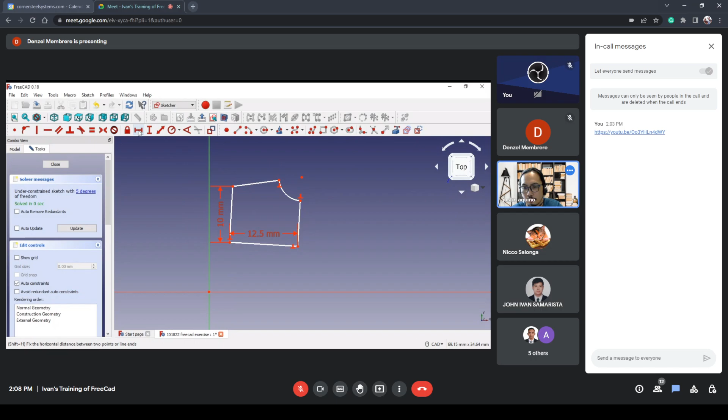See. Okay. Sorry. Okay. Okay. So, ano yun? Alt-M ba yun? Yung M yung hotkey nag-change ng control? Yes, sir. Just M key lang po. M key. Then constraint rules.

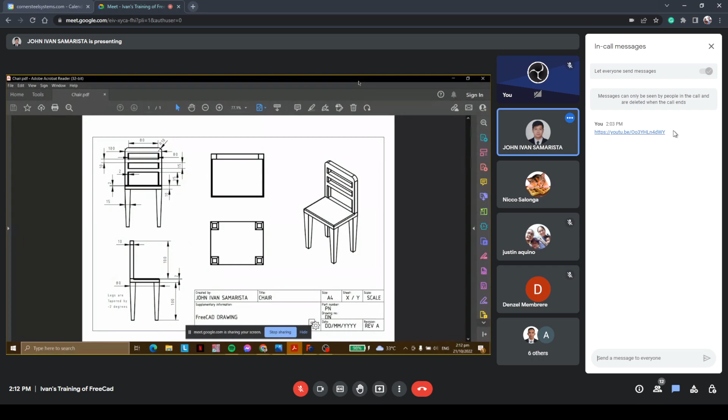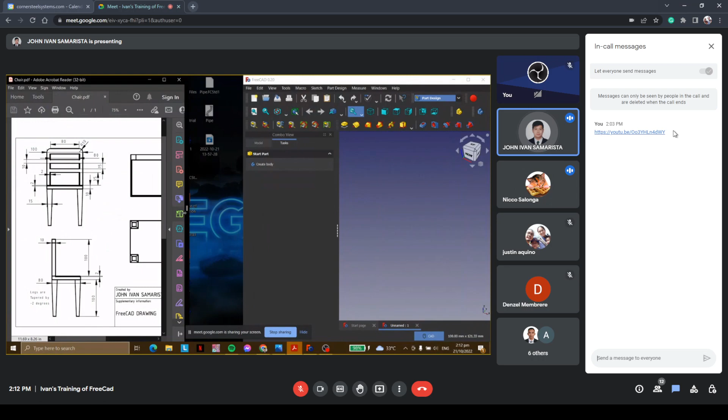So for the first model, I've created this yesterday, so we'll try to recreate this one. It's a simple chair. So wait, let's just open FreeCAD first. Okay, and now, in this specific object, the most important tool that we can use here, aside from the tools that I've introduced last meeting, is the external geometry tool. So let me show how it can be used.

So in this exercise, we'll try to replicate this simple chair. So again, we'll go to Part Design. So I'm already in Part Design, and then we create body, and then we create sketch. So in this case, I'm gonna be choosing the XY plane or the top plane.

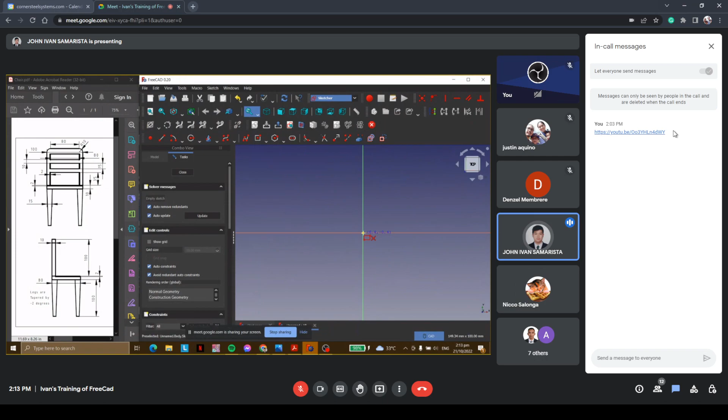Okay, so now we'll proceed to the sketch. So the very first thing is that we make a rectangle. Basically, we'll use the centered rectangle because we want it to be situated at the origin. And as we can see on the left side, the dimensions are: this is 100, and then this is 80.

Now we close this one and then we use the pad tool. We use a length of 10 millimeters. So as I've said earlier, there's one tool that's very helpful in creating objects that require different surfaces, or if an object requires you to make a sketch on a certain surface of an object. That tool is the external geometry.

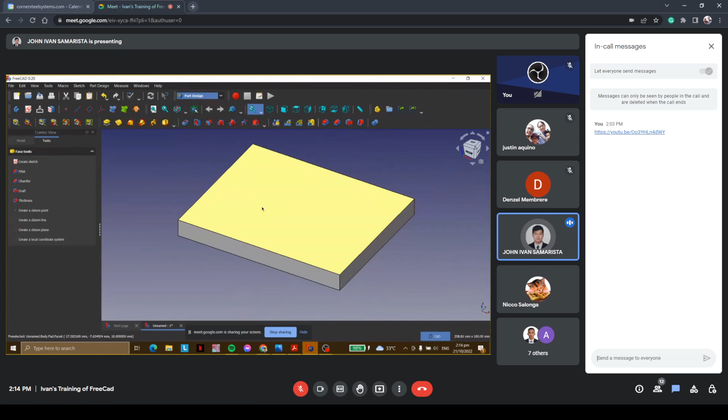So for the external geometry tool, we create a sketch first. Okay. After clicking the sketch of a certain surface, we can see the external geometry, and that is this one. It creates an edge linked to an external geometry.

So let's say we're just making a sketch here without external geometry, using a rectangle. As you can see, it's very hard for me to determine if I'm working on this exact point. So there could be a huge human error here in terms of drawing an object.

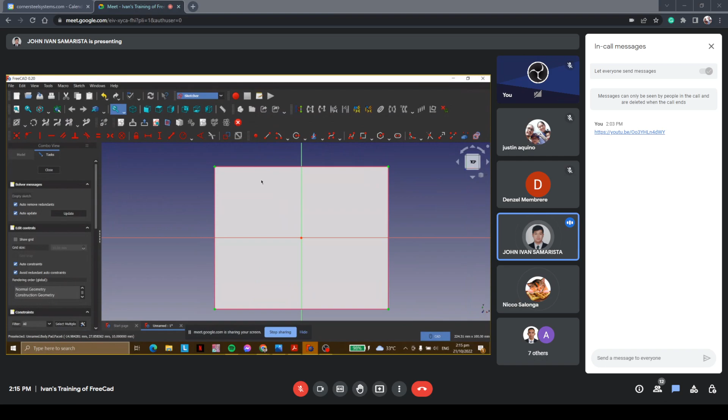However, if you use the external geometry, we just need to select the sides that we want to access. In this case, I will be selecting all the sides. Okay. After selecting the sides, we can already proceed with our sketch. Now we need to find the rectangle, and as you can see, we can already access the exact corner or point of this block.

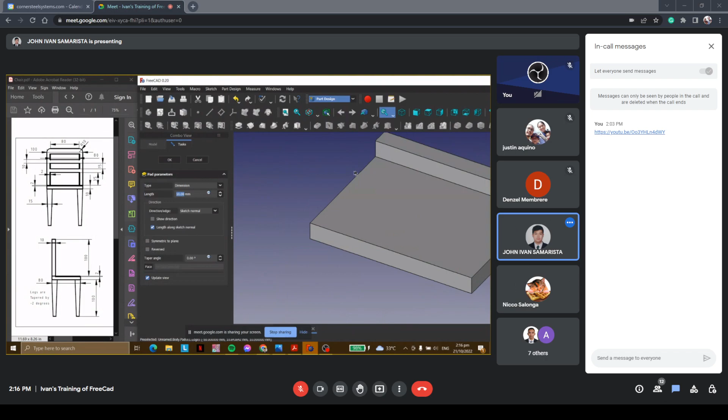And on this side, you can see that the side of this sketch is already collinear with the external geometry. Okay, so this dimension should be 10. Then we close and then we pad it again. This should be 100 millimeters.

Okay, after this, we need to replicate this part of the chair. So again, we click the surface that we want to sketch, and then we click create sketch. Again, we will be using the external geometry. And then we just try to replicate the specifications indicated on the left side. So we use 3 rectangles. Oh, no. I'm gonna be using the centered rectangle, and then try to sketch a rectangle here at the center.

Okay, after that, we just set the right dimensions. So this one should be 80. And then we'll make this one equal with the two sides. So we make this equal. The next thing is this one must have a dimension of 15. And then the distance between this one and this one should be 10.

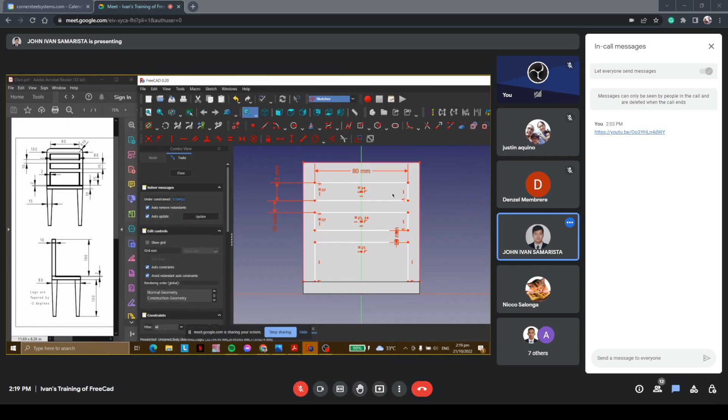So we close this, and the next tool that we will be using is the pocket. The pocket creates a pocket with the selected sketch. So we select the pocket and we just increase the length until there's a hole in it. Okay, that's okay. And now the last part is how do we create the leg.

The process is still the same. We just need to select this surface, left click, and then create sketch. After that, we need to use the external geometry again because we want to get the exact point at these 4 corners. So we use the external geometry, and then we create 4 squares.

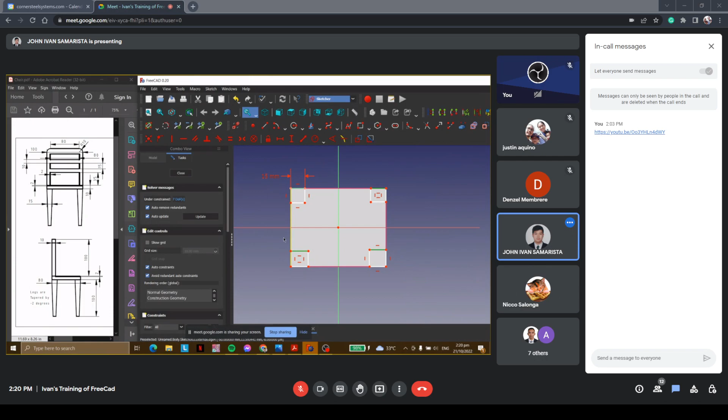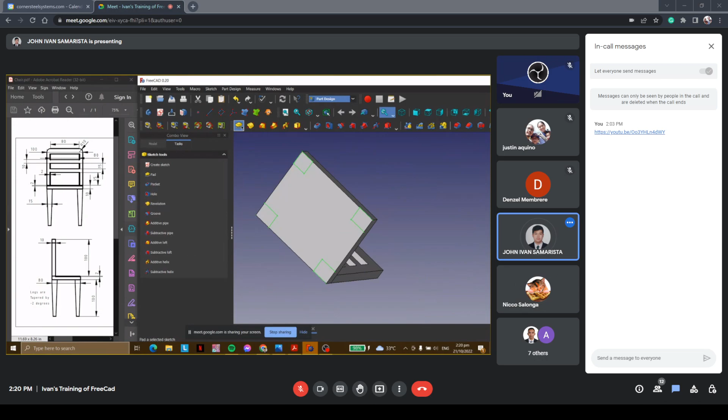And now the dimension must be 15. And I'm gonna make this one equal to this 4. Should be equal. And then this side must be 15 as well. So select everything. And then equal, so 15. And then we close, and then we pad it to 100. So we go back to padding.

So as you can see here, I've added some details. So it says here that legs are tapered by -2 degrees. So in order for us to do this, we just need to adjust the taper angle here. It says here -2 degrees. And then, okay. And then after that, as you can see, this 2 millimeters here and the 10 millimeters are fillets. So we need to fillet these 4 corners.

Fillet. So this should be 2 millimeters. And then this as well. This all must be fillet as well, so this should be 2. And then for this one, this should be, okay. This one should be 10. Okay, basically we're done with the chair.

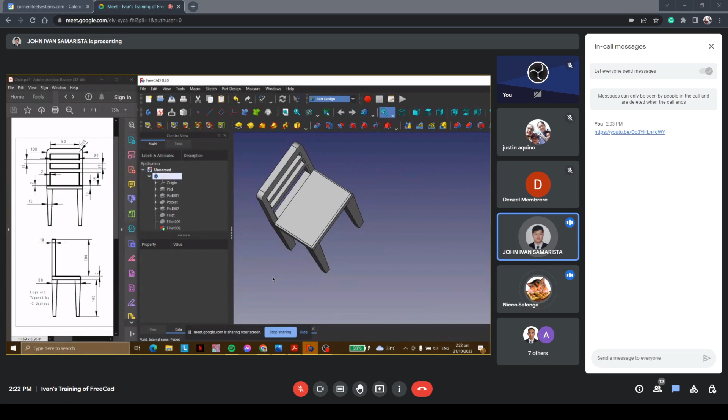So at this juncture, I will be showing you how we project this into a technical drawing. So as I've mentioned in the first session, here in the workbench selector, we can do different kinds of stuff. So if we want to project this drawing in different views, we need to go to TechDraw.

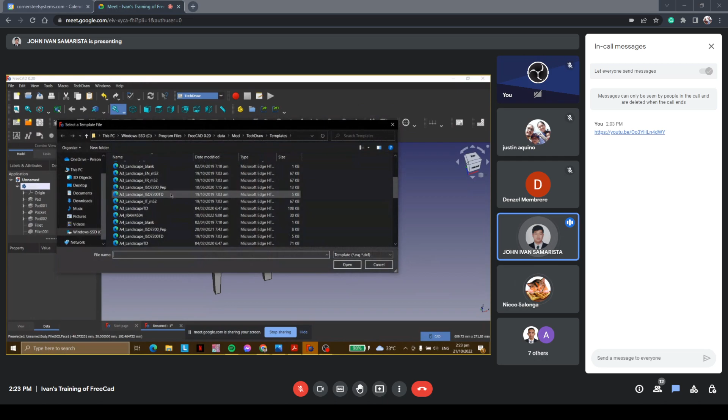So under TechDraw, we need to select first the type of technical paper that we're dealing with. So we can access that by clicking this one, the insert page using template, and then we can choose the format. So in this case, I will be choosing the A4 landscape. Then we press open. And then, so how do we project this chair on this technical paper?

So let's say we want to project the front view. So we can project the front view by just clicking, well, make sure that it is in front view already. And then in front view, and then make sure, wait, I think there's, okay, never mind. So let's say we want to project this one on this technical paper. So we need to select first the body, and then after selecting the body, you need to click the body here in the combo view. So after selecting the body, we just need to click insert view.

And then after clicking the insert view, we can see here in the other tab that the chair is already here. But it's obvious that the chair is kind of big, so we just need to adjust its size. So in order to do that, we can just click the view, and then here at the property editor tab, we can see scale type. So as for the scale type, we need to change the page into custom. So for the custom, we can adjust the scale.

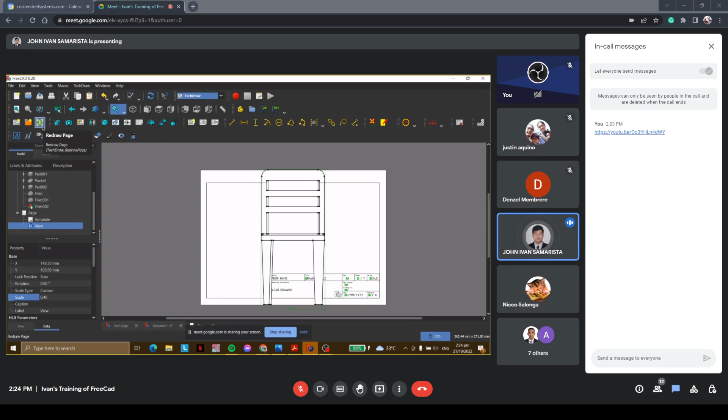So before we can see changes in our technical drawing paper, we need to refresh the page. So we need to click this one, the redraw page. Then yeah, there you go, the front view. And then let's say we want to project the side view. So we just need to orient our chair, let's say like this. And then the same process.

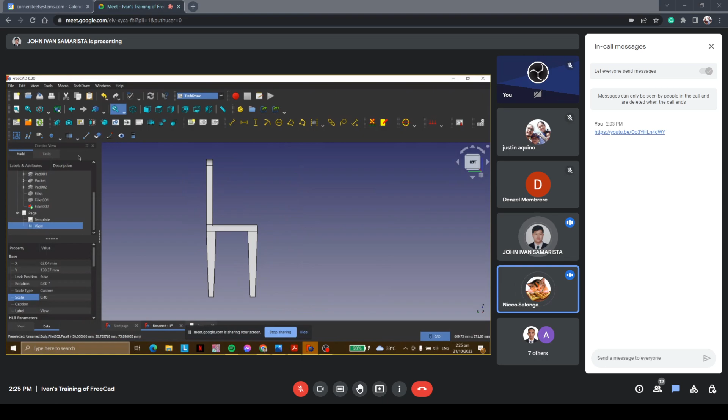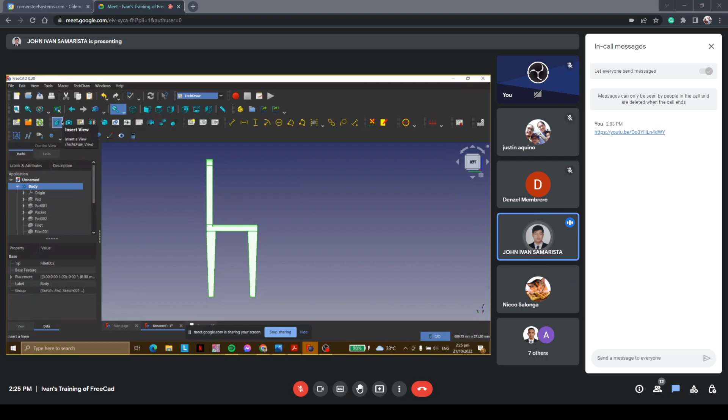We just need to select the body again. So to make sure that the body is selected, the object is already highlighted. So we need to click the body and then we click insert view. And there you go. Insert view, and then scale type, we must change it to custom. And then the scale must be 0.4. And then we refresh. Okay.

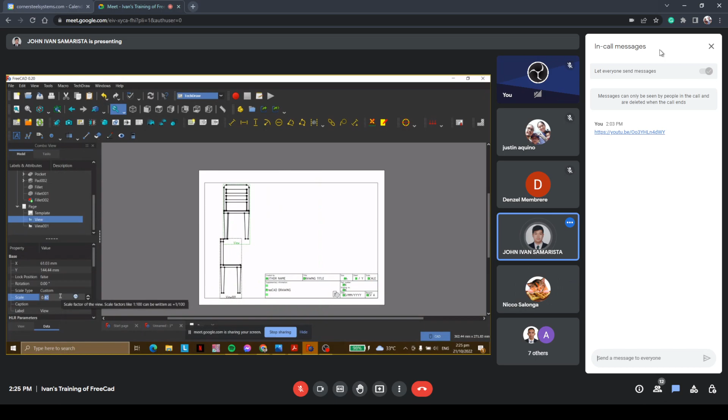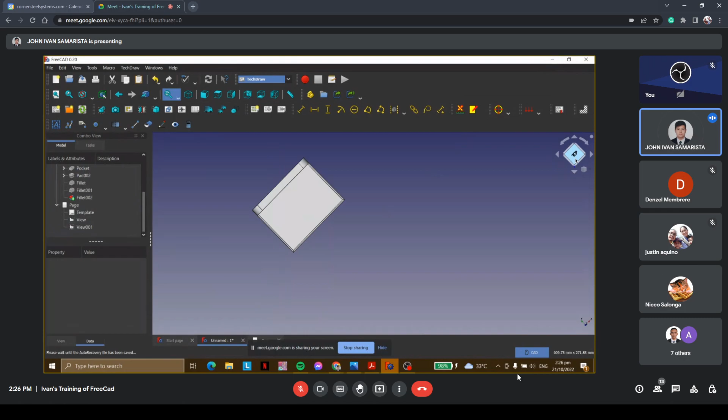I guess we need to make this smaller. So I'll adjust this again. I'll make this 0.35. And then this one 0.35 as well. And then we refresh. And then let's say we want the top and bottom view. So to do that, again, same process. You just need to go to top view. And then we click the body again and then insert view.

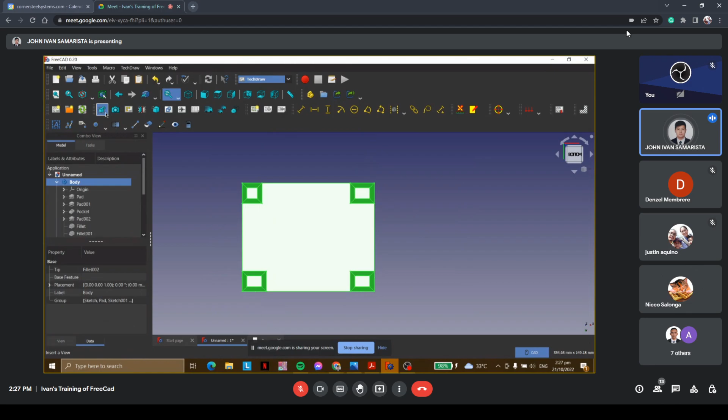And then change the scale type to custom and then scale it to 0.35. And then refresh. I guess it's a little bit small, so I'll make this 0.4 and then refresh. Now, how about the bottom view? So we just need to go to the bottom. So bottom view. Same process. We just need to click the body and then click the insert view. And then after that, we need to adjust the scale type to custom and the scale to be 0.4.

Okay, and then lastly, as for the isometric view, we just need to click this box here, and then click isometric. Same process: click body, and then click insert view. Then click this one, view, and then we change the scale type into custom, and we want this to be 0.4.

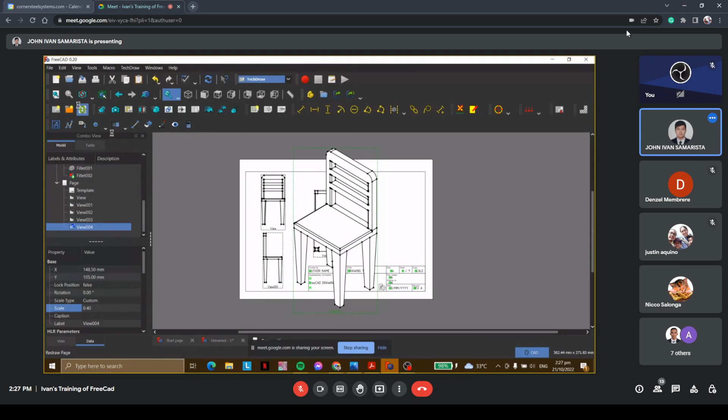Okay, now we've already projected the different views of the chair. We can change the labels. For the labels, we just need to click this view, and then we can go here at the property editor, and then we look for label. We can change this to front view.

This one, we can change this to side view. This one, we can change this to top view. This one, bottom view. And this one, isometric.

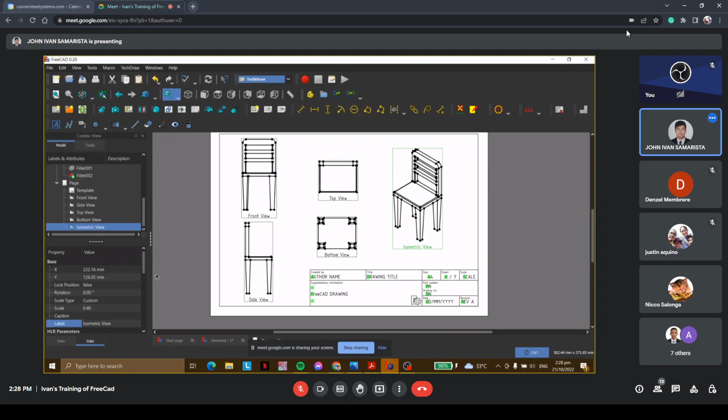So how do we put some dimensions? In putting dimensions, we first need to select the part that we want to annotate. In this case, I will be selecting this one, and then I'll be using the insert horizontal dimension. So this is 80. Then let's say I want to get the radius of this fillet part. I'll click this one, and then I'll just use insert radius.

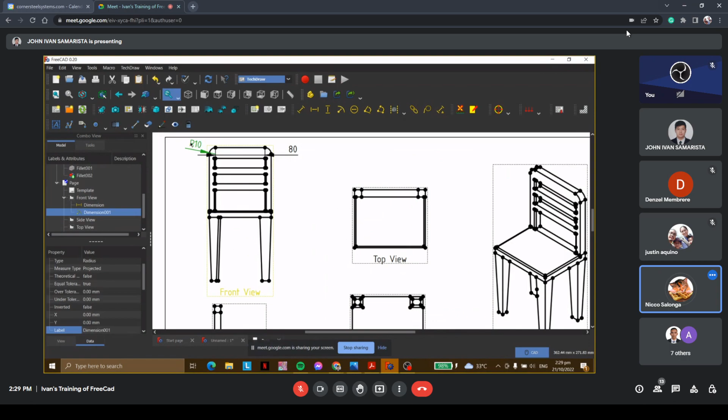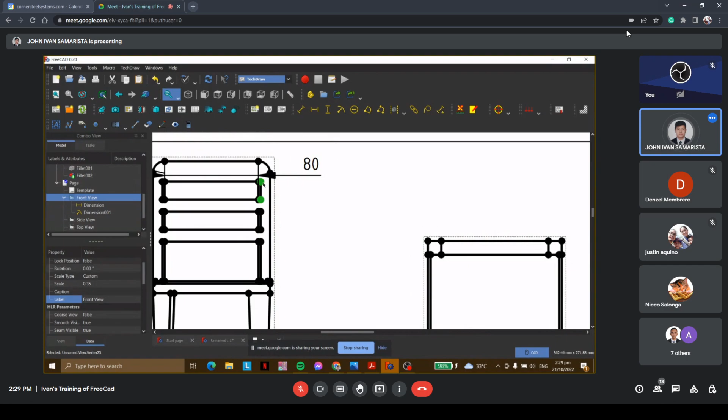And aside from choosing a line, you can also get the dimensions between two different points. Let's say I want to get the vertical dimension of this one. I just need to select the 2 points by clicking control, and then the vertical dimension. And that is 15.

So that's basically it in terms of technical drawing. The more specific technical drawing I will be teaching in the next lesson, which might include the blow up details and the section view. So that's basically it for the first model. In this model, the most important thing to highlight is the use of external geometry. Again, external geometry is used for us to access an exact point or exact line on a specific surface when we're sketching.

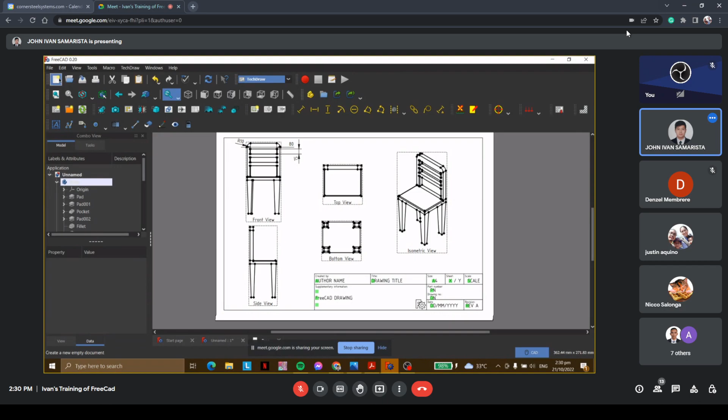So that's basically it for this chair. I'll leave this one as an exercise so you guys can replicate it. I'll be sending the PDF of the technical drawing later. As for the next model, we'll create a new one, so we'll just open a new one.

Okay, for the new model, we'll try to replicate this pipe. Nice. Okay, so this pipe, again, the process. In this pipe, we will try to use different tools of FreeCAD such as tangent, the arc, and Boolean. Boolean can be used in order to combine parts.

Aside from that, this part of the pipe we can project using the additive pipe or the sweep tool. We will be drawing a reference circle here and then a path that it needs to follow. And then lastly, we will be using the datum plane. Datum plane is very useful when we're dealing with objects with different surfaces that we need to sketch on.

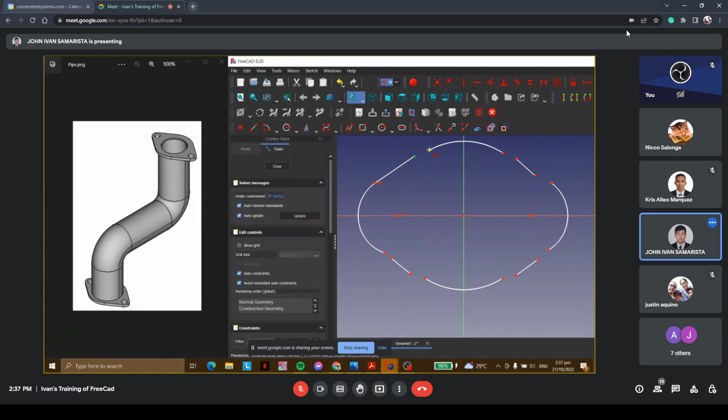Okay, so how do we connect this? We can connect this by using this tool, the constraint tangent. It creates a tangent constraint between 2 entities. So if I click this constraint tangent, we just need to simply click the points that we want to connect. In this case, I'm just clicking the end-to-end points. So I'm not pressing control. I'm just selecting the points as is.

Okay, so after this one, we need to adjust the dimensions. Again, we need to use the constraint radius, and we want this to be 20. We want this to be 20 as well. And then this one should be 72, and this one should be 72 as well. Adjusting the horizontal distance, this point and this point must have a horizontal distance of 90. And then this point and this point must have a horizontal distance of 180. So yeah, basically this is the shape of this part of the pipe.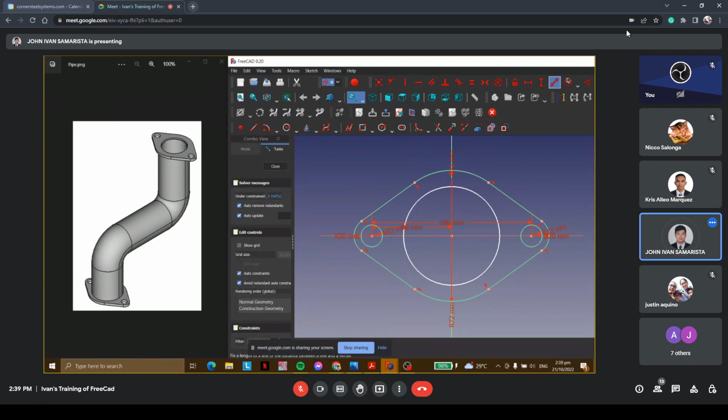And then after that, we need to add two circles here, the holes. And then we need to set a constraint radius of, let's say, 12. After that, we need to add another circle here for the hole. We need to set constraint radius of 50. Then, as you can see, it's already fully constrained, so we close this one and then we pad it. Okay, now we're done with the first part. So after this one, click OK.

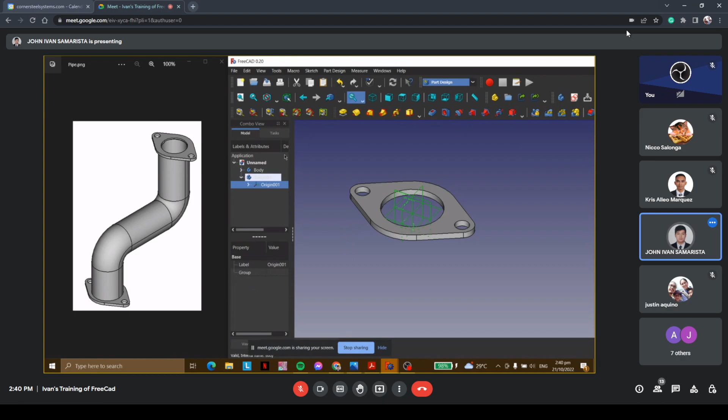So we need to create a body once again. We need to select create body. And then as you can see, we created the body 001. After this one, we need to click this one, the origin 001, and then we click the space bar. As I've said in the last meeting, in order for us to hide or unhide objects, we need to press the space bar. So in this case, if I press this origin, go something like that. And then, as I've said earlier, we will be utilizing datum planes.

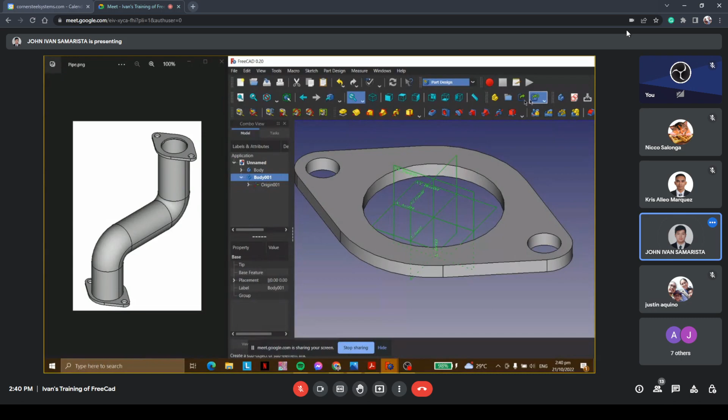Datum planes are very important in this part because we want to access the origin, the centermost point of this part. And then we want it to be situated on the same surface. So to do that, we need to click this plane, and then we need to select this one, datum plane. Okay. Now we already have this datum plane. We can select this one. So we want our plane.

So we need to select this one, and then we select the datum plane, and we want our plane to be situated 10 millimeters in the z direction, because we want our plane to be on the same surface as this one. I've used 10 millimeters because we padded our sketch earlier at 10 millimeters. Now we've created our plane, so we can simply click on this one and create a sketch.

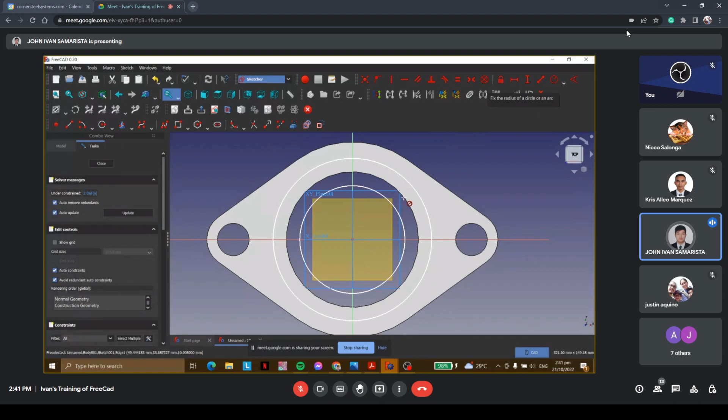At this part we will be drawing the circle that is our base circle for our path. To do that, we use the center and rim point, and we create two circles. Then we adjust the constraint radius: this one should be 60, and this one should be 50.

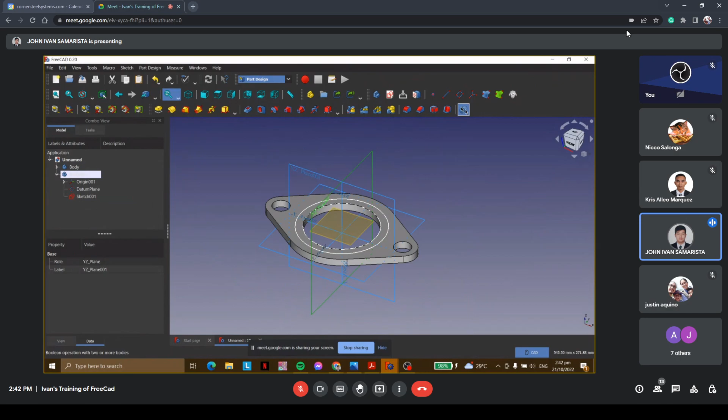We close that. The next part would be creating the path of this circle. To do that, we need to select the YZ plane, create a sketch, and on the YZ plane try to sketch the path. In this case I'll be using the polyline.

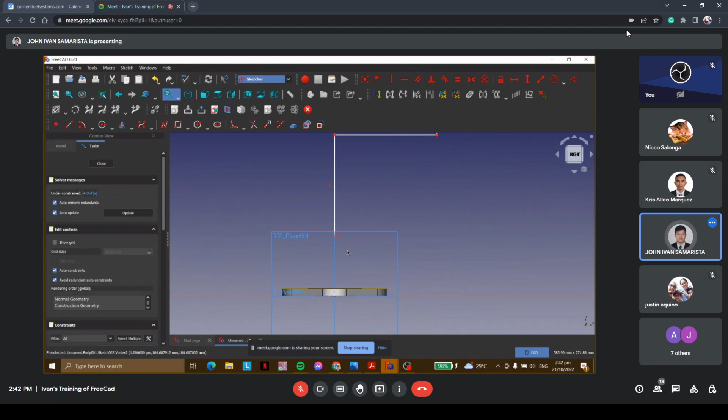Here's our polyline. The very first thing we should set is proper dimensions, so this point and the bottom point must have a vertical distance of 10. After that, we need to fillet these two sides.

In order to do that, we just click this one, fillets, and then click these two. Then we set a vertical distance from this point to this point - let's say 200. And then we change the radius to 70.

After that, let's go back to the sketch. I'll delete this first, and then create a longer line here.

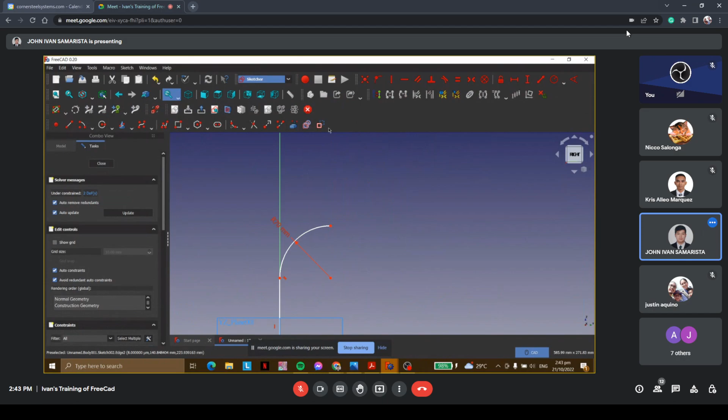In this one, we also need to fillet this corner. Again we click fillets, and then set a radius of 70 again.

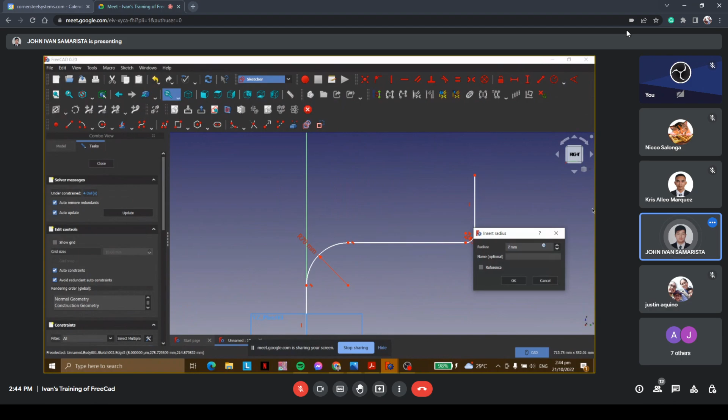Then we want this one to be horizontal. Next, we need to make this one 200 first, and then we want this one to be 70. Then we want this to be horizontal, and let's just make sure that this is 200.

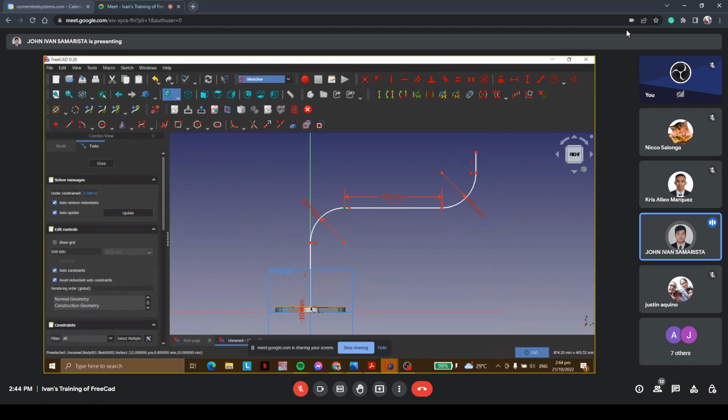Oh, it's 100, let's make this 200. And then this part should be 200 as well. Okay, and then click close.

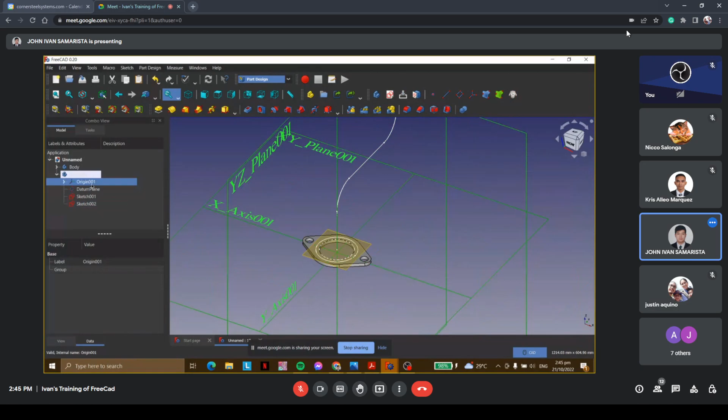In this case I'll be hiding the origin for us to see our base circle and our path, and I can also hide the datum plane. As you can see, here's our base circle and our path.

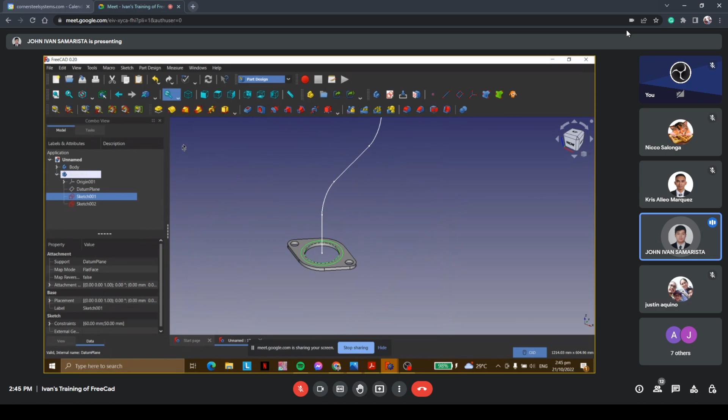In order for us to project this one, we just need first to click sketch 001, which is our base circle, and then click additive pipe. Don't mind that - so if I go back...

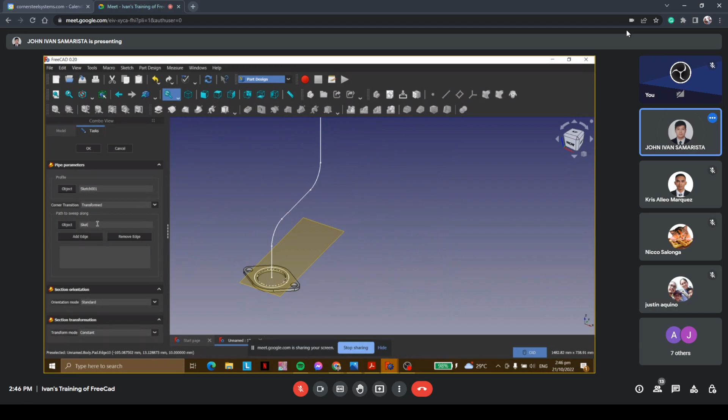Sketch 1 is our base circle, and sketch 2 is our path. If we do the same process again, pressing sketch 001 which is our base circle, and then clicking additive pipe, in this part we want the path to be sketch 002. I'll be typing sketch 002, and then we click OK.

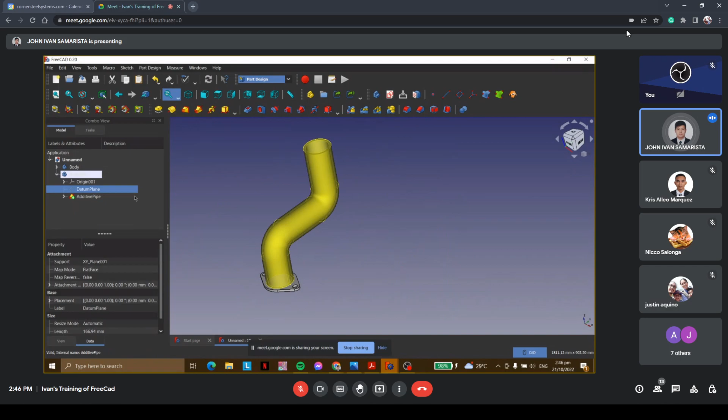Now here's our path. In order for us to have this part, this body one here, we can simply copy paste the part. To copy paste the part, we select the body, Control C, click OK, click the combo view, and Control V. As you can see here, we can already see body two.

Another tool we can use is the transform tool - just click transform and we can manually adjust it. Let's say on the top view, we can manually adjust it. This is the easiest way to combine objects, but in the next meeting I'll be teaching you the more appropriate way using the A2plus workbench. In this case we'll just be using the Boolean operation, and we want this one to be rotated.

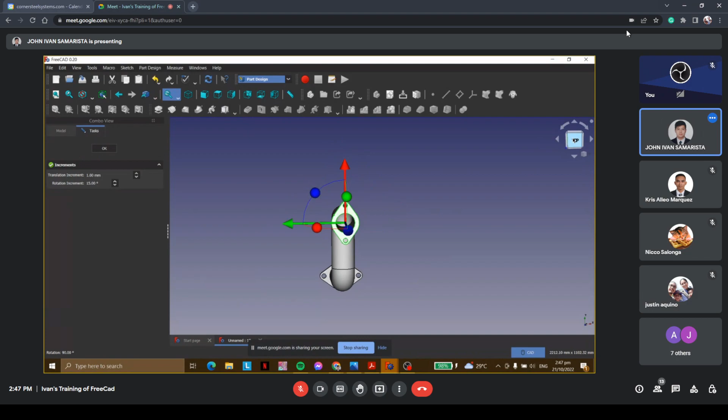Then we want the right side. Then we click OK. So now we're not yet done.

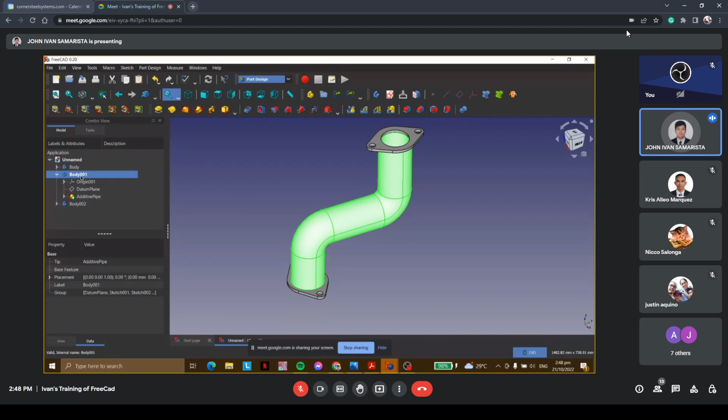Going back, as I've said, we will be using Boolean operation. Technically speaking, this object that we've created is not yet as one. So if we click this body, we can hide or unhide it separately. The same thing here, body 001, we can hide and unhide it.

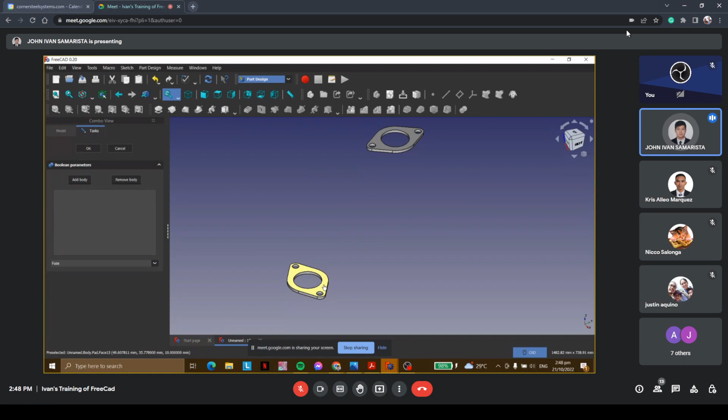So in order for us to make this object as one, we just need to go to the Boolean operation, and then we need to add body. We click add body, select this one, add body again, and select this one. Then we click OK.

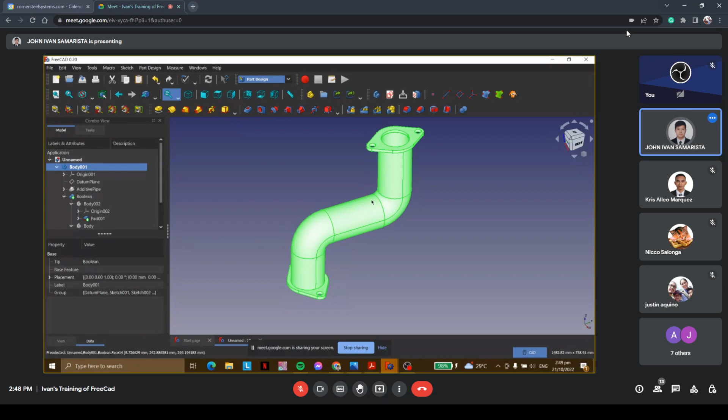As you can see, if I click this one, the three parts are already combined into one full part. So yeah, they're already combined. Sir, that's basically it for this model.

Just a summary: in this model we've used new functions. The very first thing we used was the tangent and the arc. When we sketched this part of the pipe, we first used the arc. We can create an arc by just two clicks — the first click is the first point, the second click is the second point.

After creating the arc, we've drawn some lines, and those lines are connected to those arcs that we've created. In connecting those arcs, we've used the tangent tool. Going back to that, the tangent tool is this, the constraint tangent.

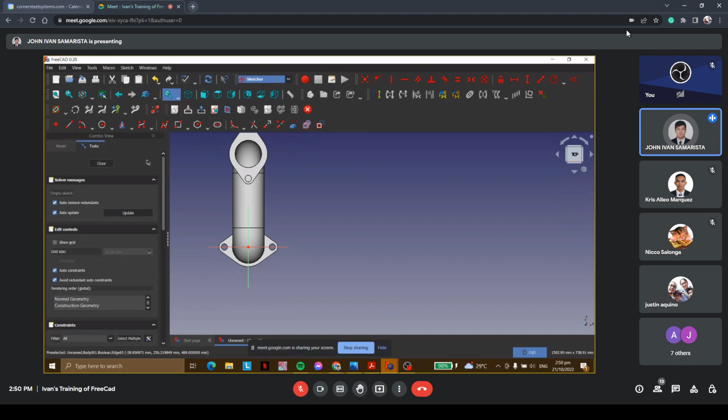After using that, we've created a datum plane. In creating a datum plane, we need to unhide the origin part, the predefined planes, so that we can choose a plane. After we choose a plane, then we click the datum plane — that's under part design. So this is the datum plane.

After we select a datum plane, we indicate a dimension. Recalling what we did earlier, I've indicated a dimension of 10 millimeters because we want the plane to be situated at the same surface of this one, in order for us to access the center point. We need this center point so we can use it in creating our base circle for the path. If we don't access the center point, it will be hard for us to make this accurate in terms of the design.

After we've created the base circles, we sketched the path. In sketching the path, we chose the right plane. After that we sketched our path, and then we used the additive pipe. In using this additive pipe, we need to select first the reference object — in that case, we selected the base circle first.

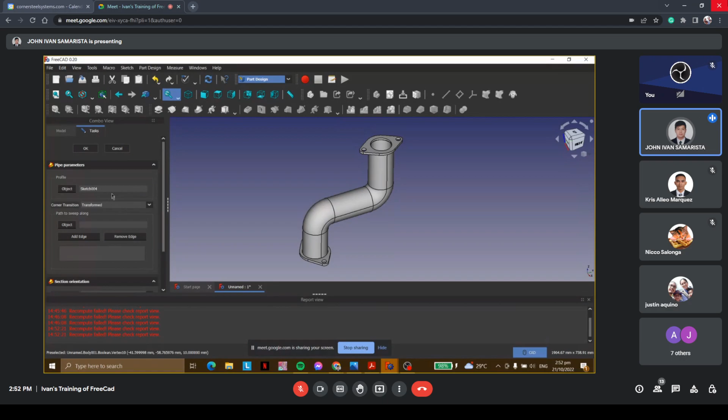Lastly, for the last part, we've copy pasted this part. That can be done by simply Control C and Control V. Make sure you're hovering your mouse at the combo view, and then you just need to transform this one.

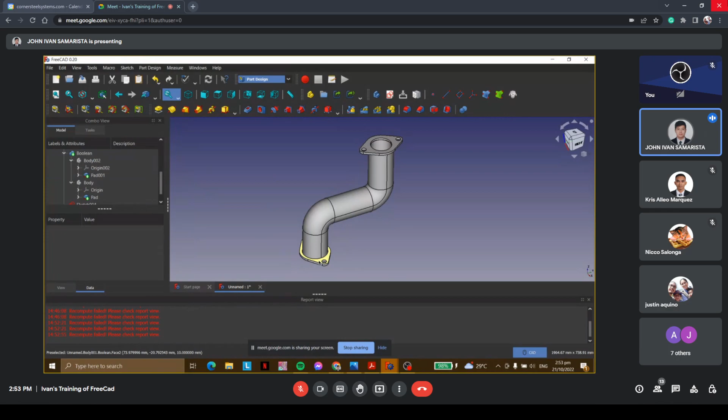You can perform transform in two ways. You can click here in the combo view, right click, and use transform, or you can simply select the object, right click, and use transform, and then you can orient it based on the reference model. Sir, that's basically it for this session.

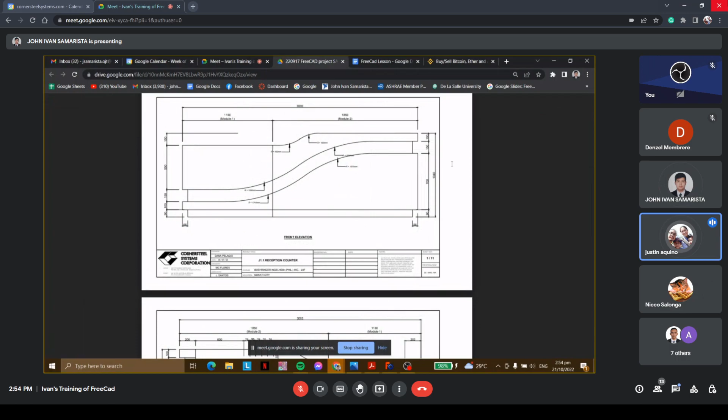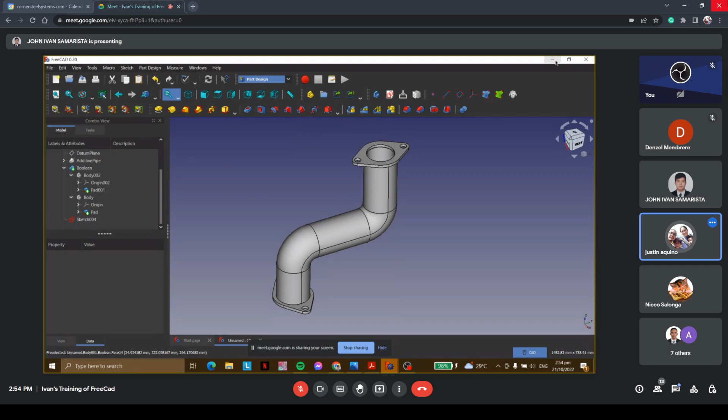And then you can subtract it from... Sorry, sir, as we can see here in the toolbar, this is additive and this is subtractive. So we could use a subtractive pipe for that.

So what happens is, is my understanding correct, Justin? The way you guys did this, you had to start from the top, from the sketch that you were given. You started first with the channel, since the box you just overplace. Then you started to trace along the box, right?

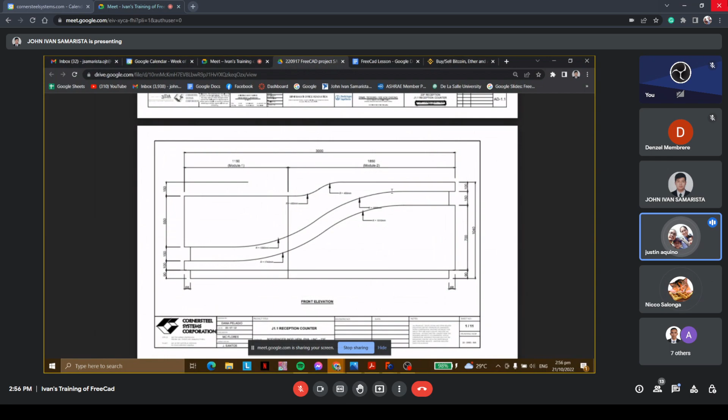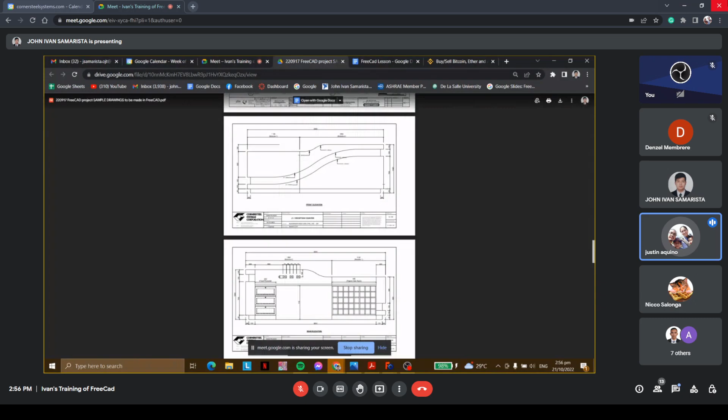So let's scroll down, what page was that? Page 17, right? All those dotted lines, I think it's page 17. I think you went past it. 17, just 17. That one above. Let's go one more page down, one more page down. There, that's it, because that's the thing.

Zoom in, Ivan. So these are the dotted lines. These are the plywood. What are these called? My description might be wrong. Board - no, that's not a board. It's 2x4s, or what do you call this?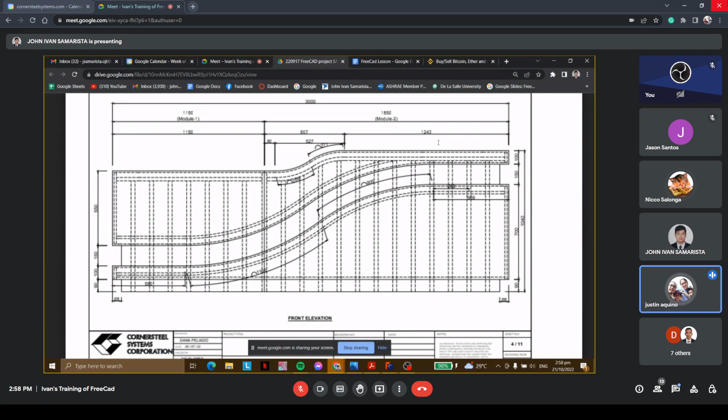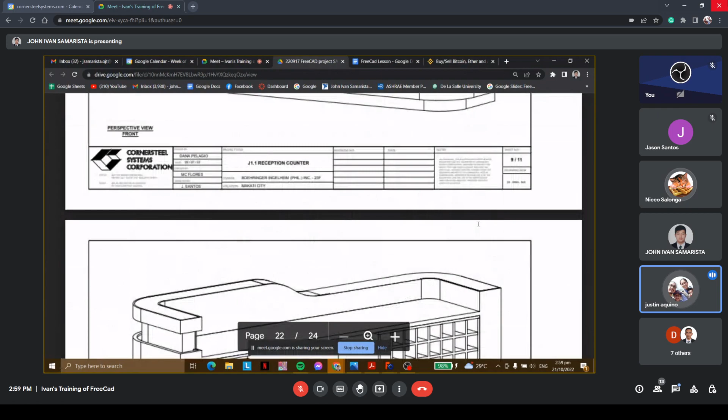So you can go to page 22, Ivan, you'll see the dimensions. Yeah, so that's the side view, the X-ray view of the cubby holes. So that's how it's supposed to look like. So the rough shape, the C shape, that will be done as probably one object, and then you subtract from it - or probably the front surface, since the front surface is a plywood that's bent, right?

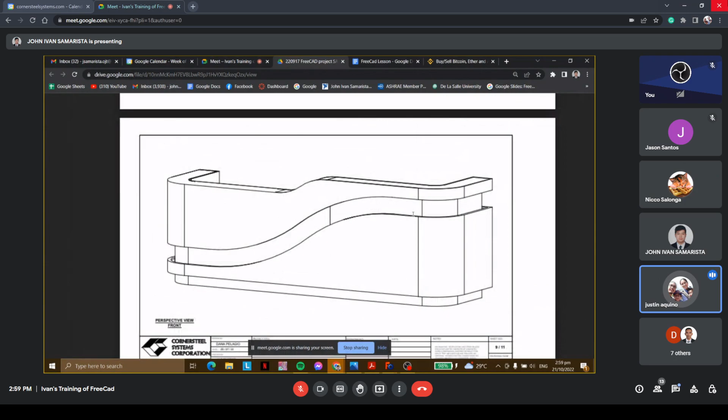Is that plywood or steel, or what is it? Plywood, sir. Shaped plywood, right? So you'd need to have the support struts already prepared so it doesn't bend, right? You carve what you call the slats, that's it.

Vertical stud, sir, the vertical studs - you need the studs, the vertical studs. So you need to first array the vertical studs and then carve out the top part. Then you're going to bend it, right?

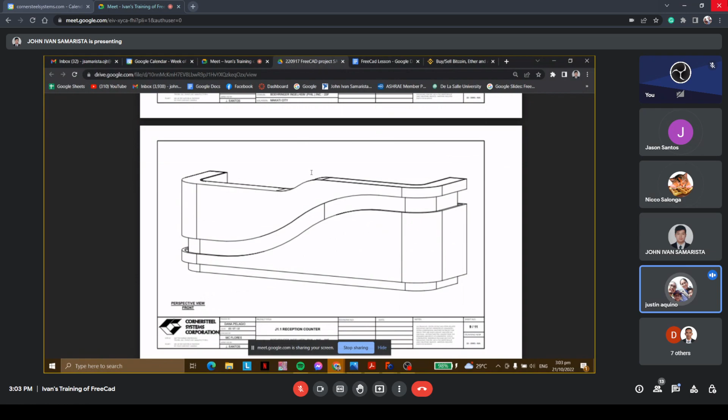Kasi meron na tayong comparison. Oh, yeah. Agree. So si Ivan will show you all the techniques. Si Alisa will take note, and then si Nicco magdo-document lahat ng techniques sa isang hiwalay na PowerPoint. Si Nicco ang mini-maintain lahat ng training natin.

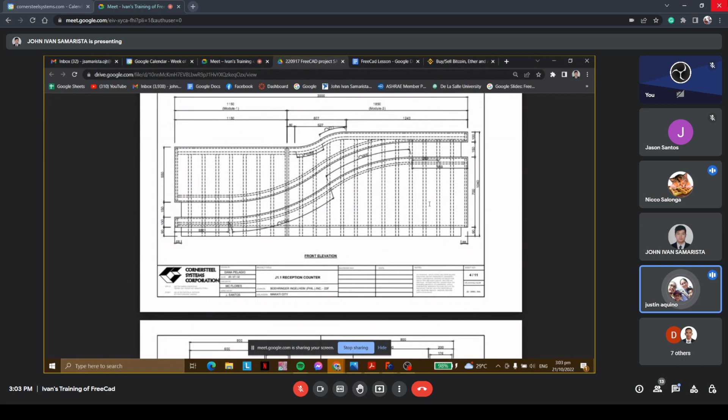And then if Ivan is still available, kasi di ba Ivan, may board exam ka na. Yes, sir. Depende sa scheduling ng board exam, we can have like a meeting just to plan out yung first stages kung gagawin to sa FreeCAD. And something like this, yung approach. So, tingnan namin yung first stage nyo sa AutoCAD, and then tatry namin sa FreeCAD. Then proceed na lang as we go.

Okay. So, sorry, just tying it back to the objectives, when I saw the training, nakita ko applicable to sa ginagawa na natin, na-realize ko, we have the basic components, it just needs assembling lang. We have the basic skill components, we just have to decide or strategize which task should be done, which activity will be done first, and then you will achieve the same outcome.

Okay. Sorry, Ivan, ito lang yung session, di ba? Yes po. So Tuesday, demonstration na lang ng capabilities. Tuesday and Friday, sample ng others. Next week po, sir, I'm planning to show po yung importing image, and then yung mga section view, and then yung details ng technical drawing. Sige. That would also help. Kasi yung importing an image saves screen real estate sa system. We can proceed with that.